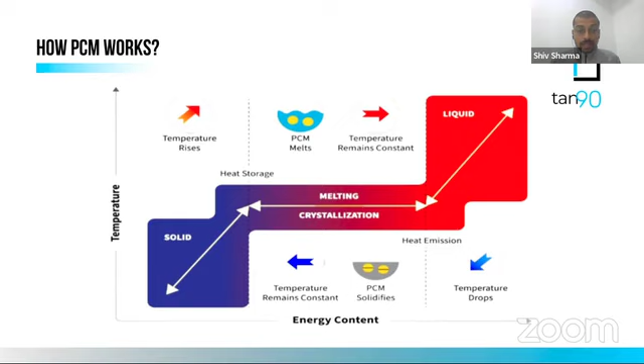So the only difference between ice and our PCM material is the retention time and the freezing time. Whereas ice will melt in just about 45 minutes if kept at ambient temperature, our material, if kept in ambient conditions, will hold its temperature, whatever it holds, like -24, -18, maintaining the integrity of solidness for 8 to 10 hours.

So if you look at the available passive solutions in the market, one solution which is very prominent is ice, which everybody knows, and people from the primary sector to tertiary sector use this solution in various fields. Apart from this, people at the tertiary level who have money power and a very organized sector use reefer vehicles in order to transport perishables, agriculture produce, and any items which need to be kept at a certain temperature.

So as of now, we either have a reefer vehicle which is high on cost but also has high flexibility, meaning you can take this vehicle anywhere at your convenience. Whereas ice has low flexibility because it cannot be used for all perishables. Suppose you cannot use ice to transport vegetables—it will damage the leaves, it will damage your perishables. Again, it cannot be used to transport ice cream or butter or any material that has been packed in paper or a cover, because it will damage that secondary packaging. So it has limitations of its own.

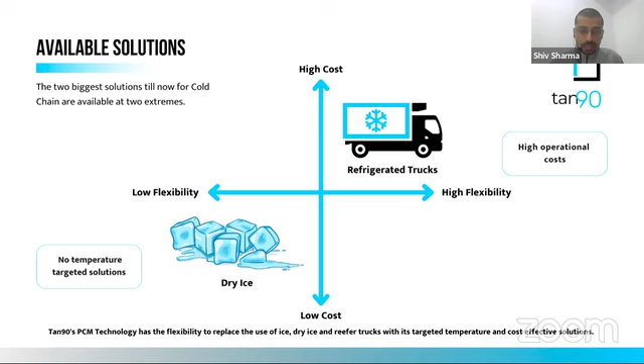It can range from -24 to +30 degrees. That means currently we have a PCM which ranges from -24 to +80. Actually, this particular PPT has not been updated. So right now we have a PCM which goes beyond 30, which is +36, +50, +55, +75, +80 degrees. So you might be wondering where +80 degree or +56 degree can be used.

Basically +30, +56 comes under the hot segment. That means there is a requirement of keeping something hot, so you can use this kind of PCM. Apart from that, you have PCM on the negative side, -18, -10. As you can see on the PPT, it also indicates that in various fields, like from ambient to frozen, various PCMs can be used.

Also, if you talk about the agriculture sector, where exotic foods like lettuce, broccoli, and mushroom need to be transported, you have to maintain a certain temperature. You have to use good packaging material that cannot be exposed to sunlight or certain temperatures, so you can avoid damage. Otherwise, you need better insulation or some cooling facility in place where it can maintain the temperature to increase the shelf life of the vegetables or agri produce.

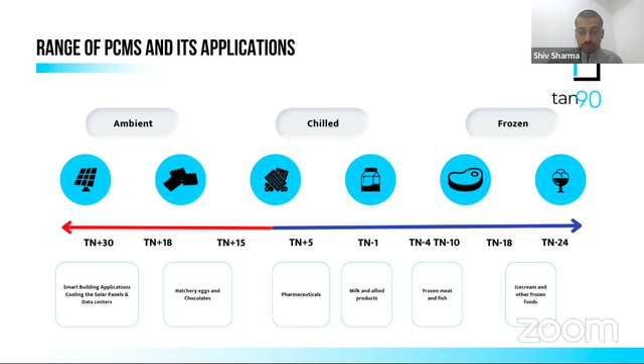So what we have developed, we have developed this particular product for different applications across different segments. If you take transportation, it basically comprises three segments: one is called first mile, one is called mid mile, and the third is called last mile. The first mile is the term from the farm to any warehouse, that is known as first mile, and mid mile is from one warehouse to another warehouse or to another city, called mid mile distribution.

And the last mile, where you have seen, like if you order any groceries, fruits or vegetables, these people will deliver at your home. That is called hyper local delivery, which comes under last mile. So all three of these segments have been able to use our products very predominantly, and we can give them different PCMs for different products right away, be it ice cream, exotic fruits, egg, or grains. So for different products, there is a different PCM in different segments.

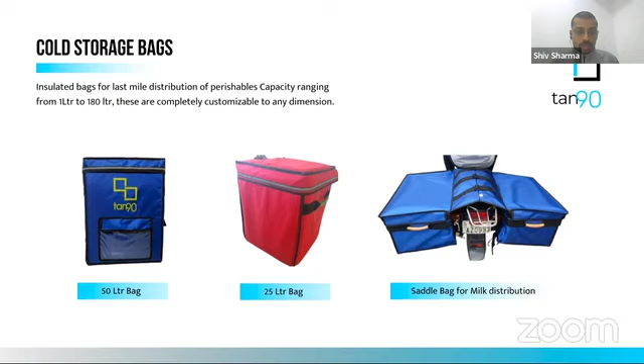We also provide bags, which we have given a new term, called a cold storage bag, which has our panels inside along the side walls, and there you can put your perishables and transport the same, be it meat, fish, any perishable. Any product that just needs a controlled temperature can be transported in these cold storage bags.

In terms of encapsulation, we have done this encapsulation of PCM in various sizes, ranging from 50 ml to 500 ml pouches, and on the panel side we have from 300 ml to 1.5 liter panels.

Basically, the pouches are used in last mile delivery, where you can see delivery boys using them with the bags, and for the mid mile and last mile, for intra-city or warehouse to warehouse movement, these panels are used inside the boxes.

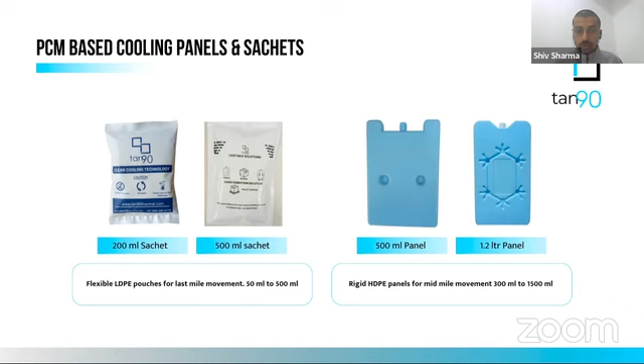Apart from these boxes, this PCM, before using, has to be frozen for certain hours. In some cases, we observed that a few people or groups of people don't have the facility in place to freeze those pouches or panels, meaning they cannot freeze our PCMs, whether in pouch or panel form.

So for that particular situation or sector, to cater to those people, we came up with a service model termed CaaS, cooling as a service. This is the first of its kind in India, and you might not have heard this term before.

You might have heard of the software as a service model, but here we are giving cooling as a service in our own country. We have presence in 5 different locations apart from Chennai, which is Pune, Mumbai, Hyderabad, Bangalore, and Delhi, and currently we are going to have one in NCR, in Gurgaon.

So what we do there is, on a daily basis from our store, we have the facility where we can freeze the PCM panels inside our freezing station, and from there we give it to the client warehouse.

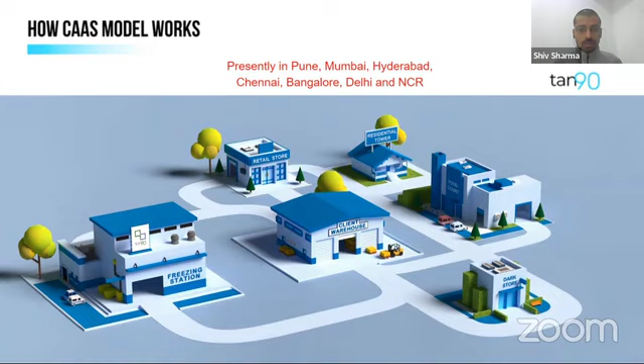So this is how this particular service model works. As I mentioned, it has zero capital investment. You don't need to have anything in place, like any active cooling solution at your end. You just place the order and get frozen panels at your doorstep with the boxes. You don't have to maintain any inventory, freeze it at home, or have an ice cream blast freezer, cold room, or storage room. You can directly harvest and use our boxes and panels to transport the same. Since you don't need inventory, space, a blast freezer, or manpower for this operation.

Going forward, let me tell you a few of the clients we have been catering to so far, for different segments. In frozen foods, we have ITC, Super K, Ecom Express Delivery. And for ice cream, we have been giving minus 24 PCM and minus 18 PCM to this segment, where they use our panels to transport their ice cream.

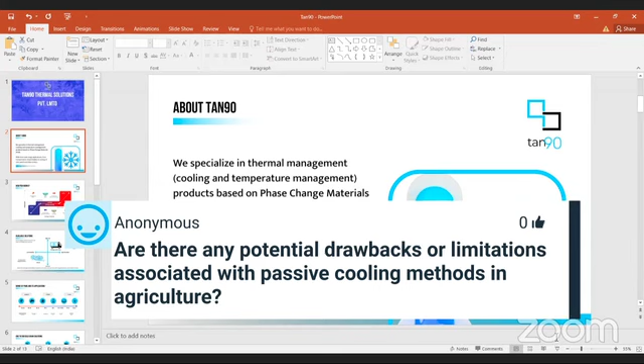Are there any potential drawbacks or limitations associated with passive cooling methods in agriculture?

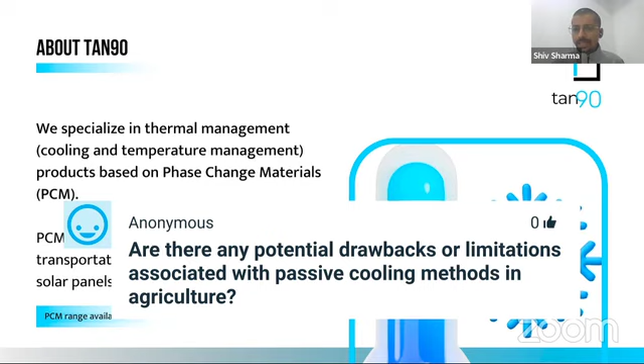There is no such limitation. I'll tell you on different verticals. It doesn't consume much power, it's very affordable, very cheap instead, and it doesn't harm. This cooling chemical, just because it has the name 'chemical,' doesn't mean it's harmful. It's not harmful at all. People have even drunk our PCM before. It's a non-toxic material, basically the salt we consume daily, like the NaCl in our kitchen—in a similar way, this is also a mixture of water and salt. So it doesn't react in that fashion, it's not harmful in a larger sense. It has one limitation, though.

You have to have some power or facility to freeze these panels, to freeze this PCM. Like water, in order to make ice you have to put it in the freezer. Similarly, you need conventional active refrigeration at your end to freeze this panel, just for 3 to 4 hours, after which it's completely frozen, and then you're free to use it for 10 to 12 hours. That is the only limitation we have as of now.

To mitigate this limitation, we have also deployed a solar-driven blast freezer in one of the villages here in Madurai, given to people in a cluster of 25 villages. They use it as a charging station—it runs on solar, and they freeze these PCM panels daily at this charging station. So yes, it has the limitation of needing power for charging for certain hours.

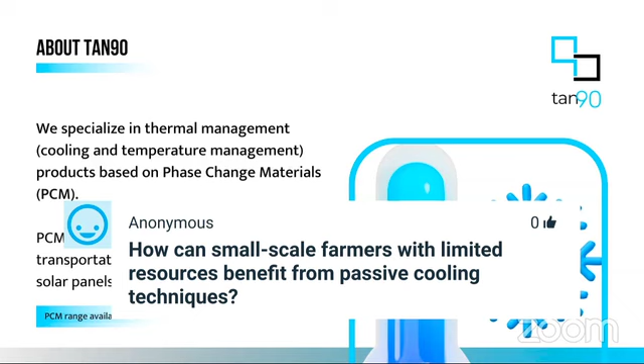So in fact, when we started this particular project, we kept the farmers as our target audience. Being an engineer and being from IIT, we believe that we have to create impact on our society.

What we have seen from 2012 to 2015, 43% of the whole agri produce India produces in a year gets wasted, and that is majorly because of the lack of cold storage facilities in all three segments, whether it's the first mile, mid mile, or last mile. That's why we have come up with this particular solution, where we have basically decentralized this whole refrigeration concept into a small box or small pouches.

You have seen in my presentation, we have developed 50 ml pouches where you have to just freeze it somewhere, and then you can use it for 2 to 3 hours in order to keep anything cool. So by keeping those farmers in mind, we have come up with this particular solution.

With the help of the Telangana government and the Tamil Nadu government, we have deployed around 2,500 boxes and 30,000 panels to serve our very own farmers.

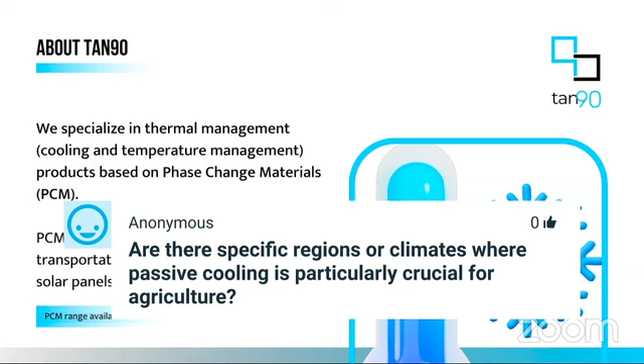Yes, I mean, it's crucial in a way that if you want to reduce post harvest loss, after harvesting people used to store produce in their premises, and for certain time they wait for a good season to sell it in the market at a better price. In order to do that, you have to maintain the integrity and freshness of your agri produce, and only a passive cooling solution can give that service. Basically, what we have seen is that farmers face a scarcity of infrastructure or electricity, and they cannot afford reefer vehicles or a cold storage unit.

So it's crucial for them. Basically, the passive cooling solution is the only solution available at the primary sector for our farmers. Apart from PCM, in certain villages what they have done is make a small room out of mud, dig out the soil, and make one small hole kind of thing where they preserve their vegetables for certain time, or they use gunny bags to pack it and splash water in between. So all these conventional things have been done in terms of passive cooling solutions.

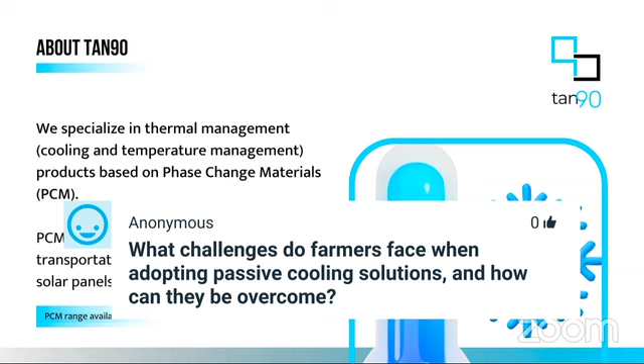So the only observation we have from the farmer end is that they lack knowledge of this particular PCM, and they confuse it with water. They consider this thing as water itself, saying it just looks like water, so they generally call it ice only, water only. Then we used to tell them or educate them that it's not water, it's PCM. It just looks like water, transparent in color, but it has a certain chemical in it which holds the temperature for a longer period of time. So mainly we have to educate those people on that front.

The second issue we faced was with freezing in a particular chest freezer or facility. They only freeze it for half an hour, 2 hours, 3 hours. They're just putting it inside the freezer, and after a couple of hours, they're taking it out without checking whether it has completely frozen or not. So in that front, we faced the problem that farmers were not able to use this PCM pad efficiently because of lack of awareness.

So what we did through the FPO—initially we tried directly and we failed. We went to the farmers and sold this product, catering to these farmers directly. But we observed that we were not able to cater to them very well since they had problems at their end. Because of that, we approached certain FPOs and the government, and went through a government channel where the government gives them a particular session teaching them how to use these panels, and also gives them the subsidy.

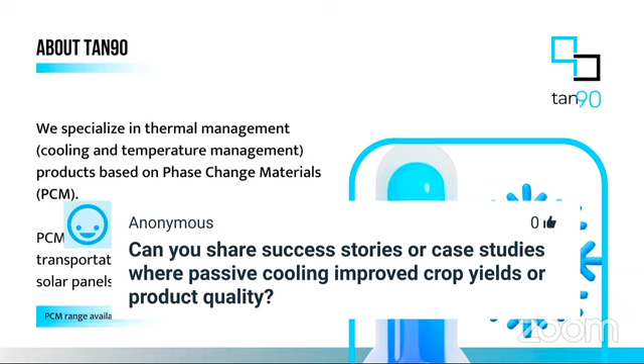When we started back in 2018, MCRC, Murugappa Chettiar Research Center, which is basically a vertical of the Murugappa group here in Tamil Nadu, took our boxes initially. They wanted to experiment with our product, and they were very kind, giving a lot of support. They took our boxes and panels and deployed them in a few villages—I have 4 villages in my head right now: one is Karaikudi, one is Chidambaram, the third is Cuddalore, and one is nearby Madurai.

What they had seen earlier was that farmers used to have wastage of 2 to 2.5 kg on average, on a daily basis. When they started using this box along with the panels, they reported back to us directly. They were able to sell all the vegetables at the end of the day with greater value and zero loss. That was an eye opener for us, because we couldn't expect that much. We were able to reduce the wastage from 2.5 kg to zero per box, per farmer. So we saw the direct impact of our passive cooling solution on the farmers—that was very interesting feedback from the market.

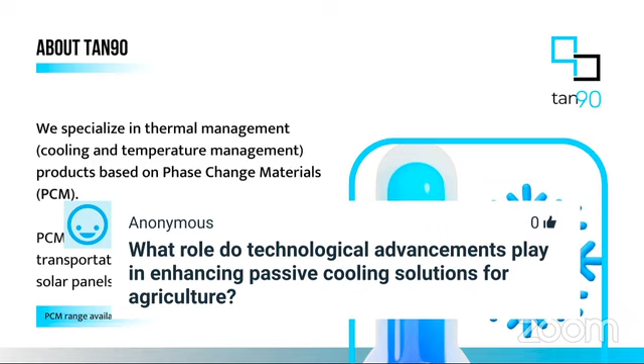Okay. What role do technological advancements play in enhancing passive cooling solutions for agriculture?

So about technological advancement—if I talk about PCM, it's something which is not very unknown. In the 1960s, Indian scientists used this particular PCM in satellites. But after that, this PCM has not been used much—people are not aware of this particular solution. The only difference from that time until now is that people fail to understand how PCM can be useful, in what way, and to what extent we can use it.

And there, certainly we need to innovate this particular material, because all the PCM materials we have, ranging from -24 to +80 degrees, are all patented and developed by us, our very own.

And inside the campus itself, we tested and we developed this. So this is not the same PCM that people used in 1960 in satellites - those were PCM closer to water, which holds the 2 or 3 degree temperature. But we have been able to gather the knowledge and innovate this PCM.